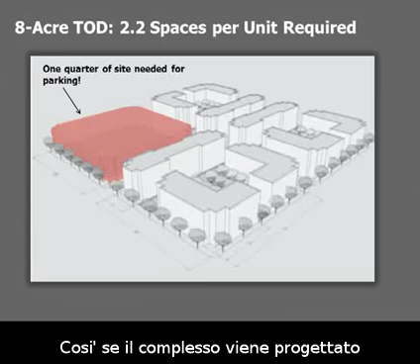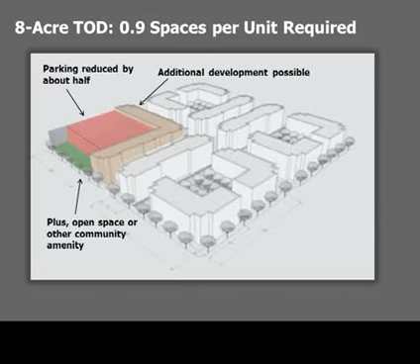This is particularly problematic given the fact that we know, based upon the data, that people living at transit-oriented development projects here in the Bay Area have a lot lower parking demand than people living in more automobile-dependent spaces. And so if we designed our transit-oriented development sites based upon actual demand rather than one-size-fits-all demand, the result would be less parking, better building developments, more housing, and more opportunities for community benefits.

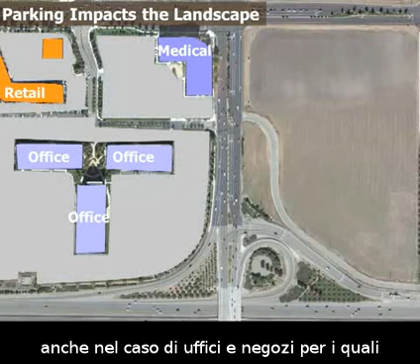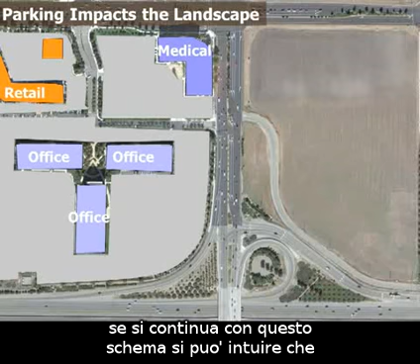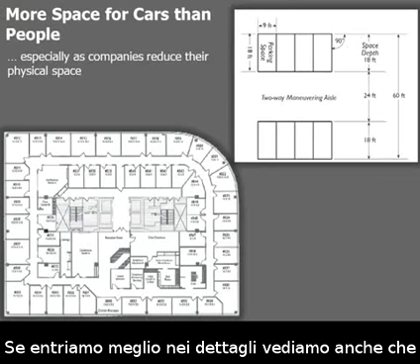Excessive minimum parking requirements also have a very large impact on the landscape. In this example, in another Bay Area location, you can see that when minimum parking requirements are required for each individual land use, the amount of area set aside for parking significantly exceeds the building area itself, even for buildings like retail and office that could readily share parking because their peak parking demand occurs at different times of day. As this pattern continues, you can see how our agricultural landscapes in the Bay Area are quickly turned over to fields of asphalt.

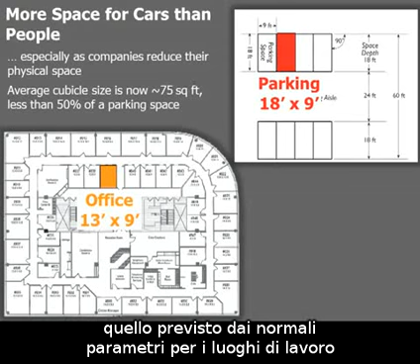When we look at more detail, we also see that the amount of space that a parking space takes up exceeds the amount of space that most of us work in. More importantly, when you start including the drive aisle space in a parking lot, the total amount set aside per car exceeds that of a typical studio apartment.

Moreover, the sort of parking requirements that may work in one place in your community may not work in another place in your community. Similarly, at the fine scale, for building locations on small lots or in challenging locations, it simply may not be physically possible to accommodate the right number of parking spaces on site. And so, for a sensible parking scenario, we need to be more flexible and to allow for important tools like sharing.

It's also important to ask the question whether we in fact need minimum parking requirements at all. What would happen if we were to get rid of them? Would the world end? Would people have to drive around in circles endlessly to try to find a parking space? Would developers build no parking? In fact, when we look at communities around the world, or even here in the Bay Area, that have significantly reduced or eliminated their minimum parking requirements, instead what we find is that developers build the right number of parking spaces and invest the savings in creating more livable, more walkable, more desirable communities.

And in fact, there are many examples here in the Bay Area, including places like downtown Petaluma and downtown Napa, that have significantly reduced their parking in order to achieve their larger community economic development and quality of life goals.

It's also important to realize that if we simply plan for the average parking demand, we're only serving that 40 to 60% of our community that actually wants that amount of parking. We're completely ignoring the fact that there are a significant number of households that want fewer cars, and in some cases, no car at all. So providing a more flexible approach to parking allows us to accommodate both households with fewer cars, as well as households with more cars than the average.

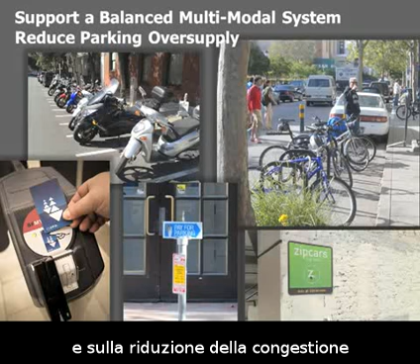A smarter approach to parking is also a critical component of any balanced multimodal transportation system that wants to focus on walkability, on transit accessibility, on reduced traffic congestion, improved quality of life, reduced carbon dioxide emissions, and improved air quality. So we urge you to think about the role of minimum parking requirements in meeting your community's larger goals and rethink them in order to make sure that they're in alignment with your largest goals.